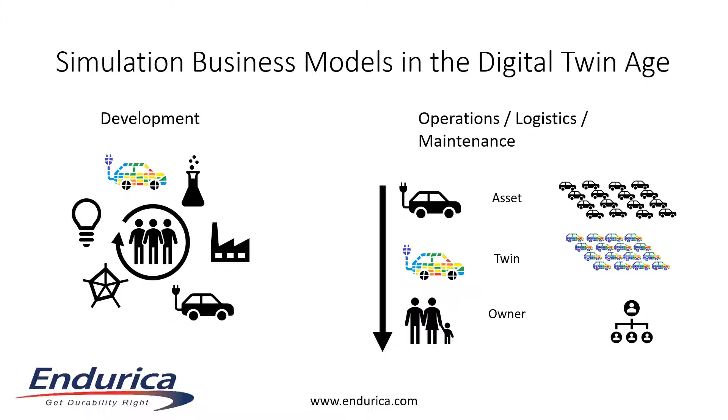So how close to this vision do you think we are? Let's assume that we can get displacements or loads off of the car frame. There's existing sensor technology for that, right? Assuming we can do that, what barriers remain? Well, first of all, we're going to need to be able to take those displacements or loads and convert those into strain history, stresses and strains on the part. Now, traditionally, finite elements can do that very well, although that's traditionally been a very slow process.

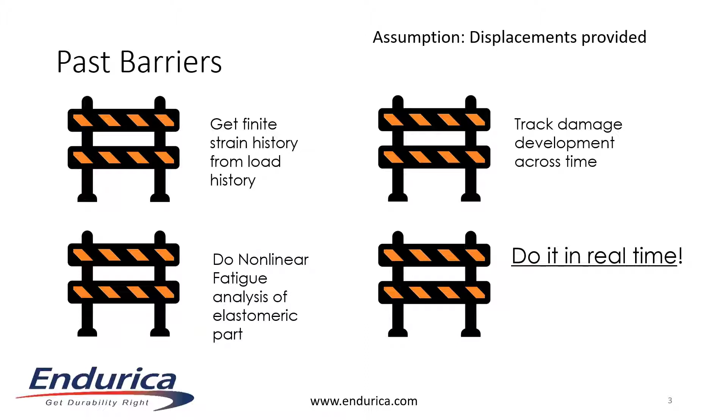So that's one barrier. Another is that we're going to need to be able to do a fatigue analysis, and of course, rubber fatigue has to involve certain nonlinearities, certain special effects. We have some fatigue solvers that can do that. We're going to need to be able to iteratively update the damage state every time we get a new sample of the latest displacement or load history. So that's another barrier that we're going to need to get past. And then finally, all of these things, we're going to need to be able to do them in real time.

Okay, so let's dive right in. In order to get a twin up and running, there's two phases that we're going to need to go through. In the first phase, we're going to implement and initialize the twin, right? Get everything set up so we can run it. And then the second phase is actually running the twin. Now, in the implementation and initialization phase, there's really two big tasks that we have to do.

The first one is to address this barrier with the finite element, right? When we're running the twin, the finite element analysis is not going to run fast enough to operate in real time. So we need something faster that lets us convert from loads and displacements into stresses and strains on the whole part. And we're going to use a tool called Endurica EIE. It's what we call an interpolation engine. And the basic idea is that you use your finite element model to model a series of pre-computed finite element solutions.

We store those, and then that becomes a nonlinear map between displacements and strains, and we can evaluate that map very, very rapidly. We've done benchmarks, and we can hit speeds of about 10,000 times faster than a finite element job using EIE if we've pre-computed the solution. So that's one thing we're going to do to get set up.

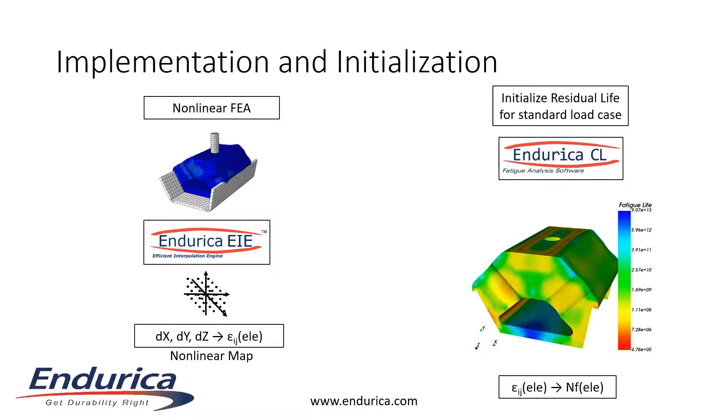The other thing we're going to do is we're going to initialize residual life by means of a standard load case. So we're going to have some standard load case that's sort of nominal operation of the part, and at time zero, before we've accrued any history, we're going to ask the question, how many repeats of that standard load case can the part endure? And then as the part accrues actual loads, we're going to use that standard load case as a measuring stick to quantify remaining life in the part.

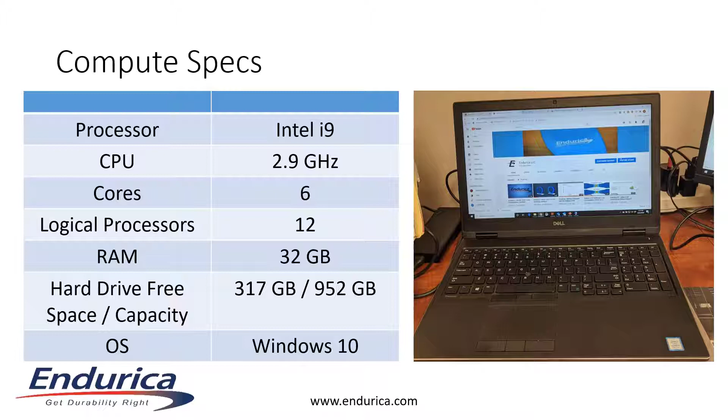So in the example I'm going to show you, I'm running all of these examples on my laptop. We're going to do this live for you. You can see it's a couple years old, but a good spec, but nothing crazy. 2.9 gigahertz, 6 cores, 32 gig of RAM, running Windows.

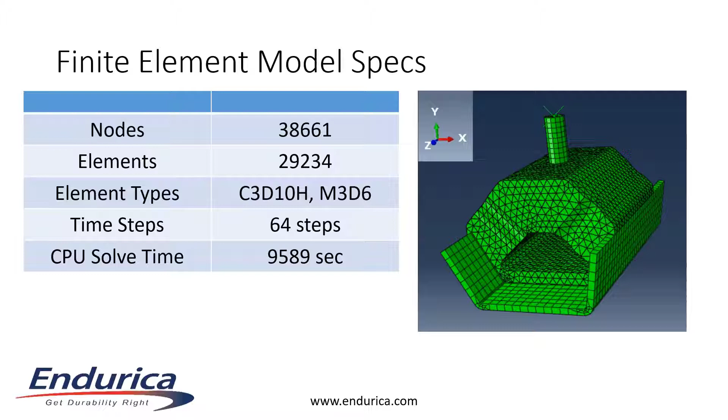So the finite element model that we ran to implement the nonlinear map is shown here. It's a model that has almost 30,000 finite elements. These are solid continuum hybrid elements, and we've also used membrane elements on the free surfaces to increase accuracy of the plane stress condition. Cracks in this part initiate on the free surface. In this model, there are 64 time steps, and we'll talk a little bit more about that in the coming slides. The total solve time on this is not quite 3 hours.

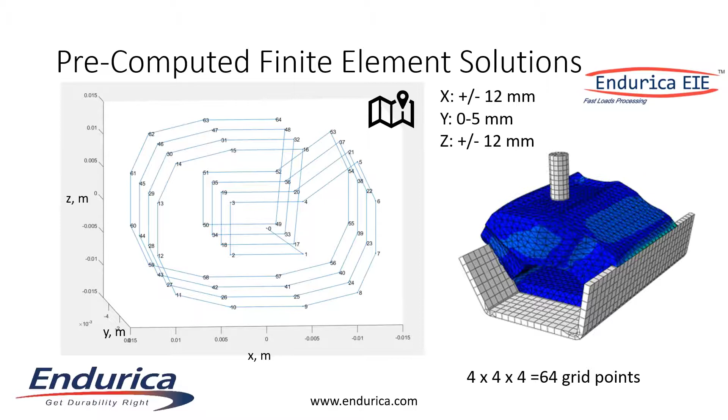After we build the map for interpolation, then we need to initialize residual life on the part. We use Endurica CL to do critical plane analysis of the standard load case. In this case, the standard load case is a single compression: no X load, no Z load, just a single compression to 3.75 millimeters of displacement. Endurica CL uses a technology called critical plane analysis. For our critical plane analysis, we've done the calculation on 17 planes for each element.

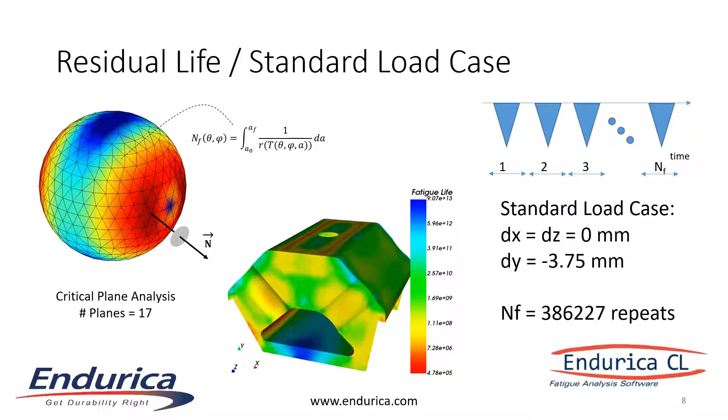Basically we're assuming that a crack could take any orientation, and we're looking for the crack that gives the shortest life. When you do this analysis for this mount under the standard load case, before accruing any damage, this part has a residual life of 386,227 repeats. So now we have our interpolation map set up. We have our digital twin initial residual lives initialized. So we're ready to start operating the twin. I'm going to show you an example here in just a sec.

When we send the data acquisition information, the first step is to send it to our nonlinear map. EIE is going to use the map to interpolate the loads and produce strain history for every finite element in the model. Once we have the strain history, we're going to pass that to our Endurica DT fatigue solver. We're actually going to run two jobs. The first DT job is going to accrue the damage in each element that occurs because of those strain histories.

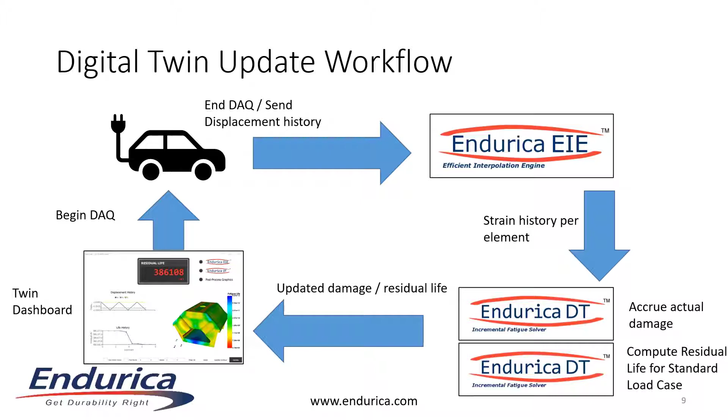Now that's kind of a hypothetical because it assumes a certain kind of load history going forward, but that's what we're going to use as the measuring stick of residual life. We'll also be able to look at crack length as a function of accumulated increments. And then we can pass out the residual life and the crack length for each element in the model. We can display those on a dashboard, and we're ready to start the whole process. So let's go do it.

All right, let's do this. First thing I'm going to do is kick off the digital twin interface. This reading here is the number of repeats of the downward standard load case, 3.75 millimeters down. Also going to launch the Windows Task Manager so we can watch the CPU. There's 6 cores, so when it's pegged, that means you're running on all 6 cores.

So for the first load step, before we bring in real data, let's do a few verification cases. The first thing I want to do is just load up the standard load case. So we're going to do a 3.75 millimeters downwards displacement and just a single cycle. What we want to see is that we produce a decrement of 1 repeat in the residual life, and that's exactly what happens. So I do 3.75 millimeters down, I get a decrement of 1 on the cycle.

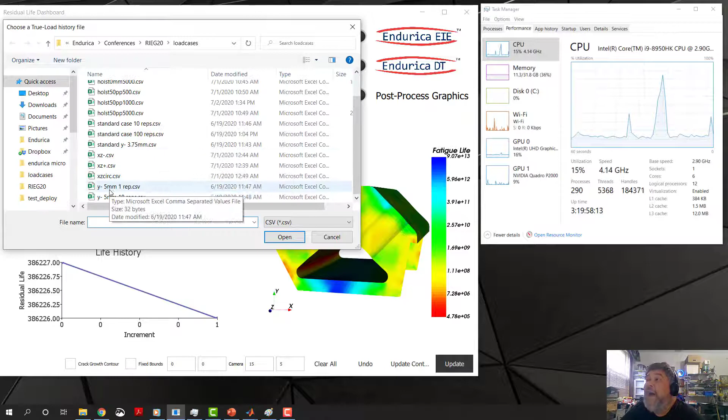So we could also say, well, what if I do a heavier load? Instead of 3.75 millimeters, what if I do, say, 5 millimeters? Well, so here we go. I've just hit the update button, loaded up the data. Here's a single cycle, 5 millimeters down. And what this is telling us is that the 5 millimeter down load case has decremented the residual life by 3 repeats of the standard load case, which, if you remember, was 3.75 millimeters.

You can see this is the plot of residual life versus the data file that we've uploaded. In the first one, it went down by 1 cycle, and now we've gone down by another 3 cycles. So this is the displacement history. This is the residual life history. The contour colors that you're looking at are showing the residual life at each element in the model. You can see that the deepest red is occurring on the inside crease here. So as we load in compression, we're seeing cracks on this inside radius.

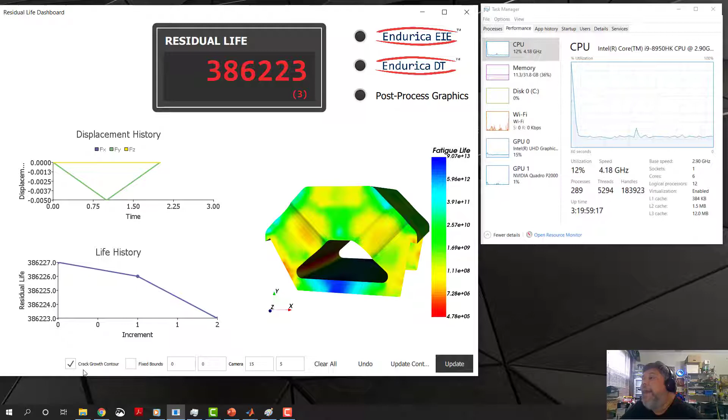In addition to looking at residual life, we also could look at change in crack length. I like that view. Let me update it here. I like that view because it better highlights where the most recent damage is occurring. And so you can see, again, it's on that inside crease. We're seeing a crack growth of something like 8 times 10 to the minus 7 millimeters.

As we're going through this, also notice these lights. These are showing you run time: how much time is spent in EIE, how much is spent in DT, and how much is spent developing these graphics.

Also before we go on, I'm going to put on a little bit of background music for your listening enjoyment. Thought I would play Mars, the Bringer of War. How's that for a background? So let's play that.

Okay, so we validated that it works for a bigger load. What if we do multiple repeats? Instead of doing one repeat of the standard load, what if we do 10 repeats of the standard load? Well, I hope it would decrement by 10 cycles. So here's 10 cycles, and here's a decrement by 10 standard repeats of the load. And you can see the count has gone down. You can see we haven't really changed the failure mode because we're just pushing harder in the same direction.

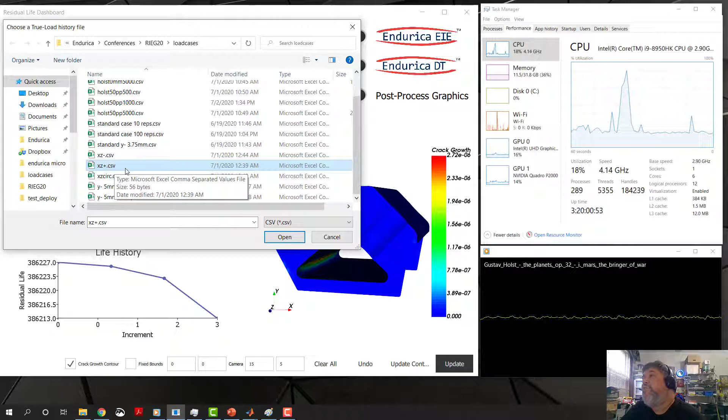Fine. What if we do something a little bit different now? What if we push in the plus X plus Z direction? I've got a data file here where we've set that case up. We're going to push 12 millimeters in the plus X direction simultaneously with a push 12 millimeters in the Z direction. So let's go ahead and run that. 0 to 12, a single cycle.

Now this has a little bit of compression on it. It's got the standard 3.75 millimeter compression. That's the green line. And in this case, these lateral loads that we've just imposed don't really decrement the residual life counter, which maybe doesn't surprise, because the damage that's going to happen isn't necessarily the same as what we were seeing before.

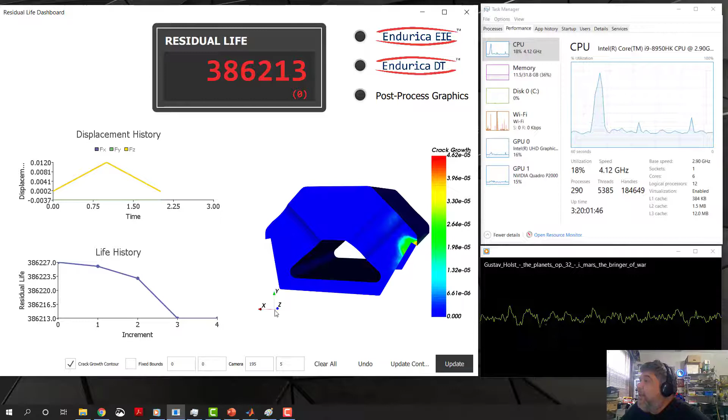Now we don't see any damage on this back face, but before we move on, let's check the front face of the mount. So I'm just going to rotate the view by here, and what you can see is that we've done some damage on this corner of the mount, right? So if we're pushing in the plus X direction and in the plus Z direction, that means these three corners are in compression, right? They go more into compression, but this corner goes into tension because of the lateral load that we've applied. And so that's the corner that gets the most damage. That makes sense.

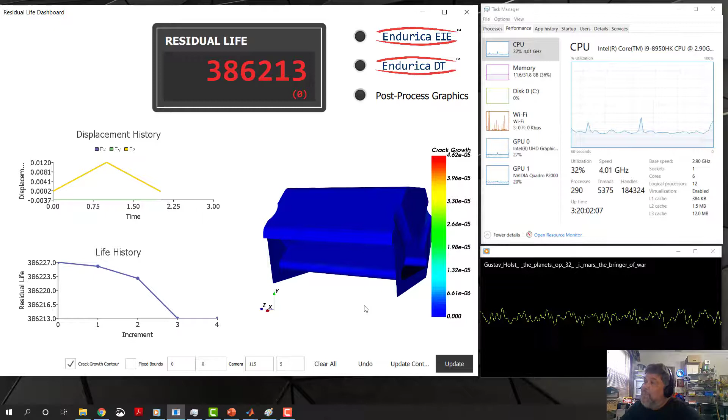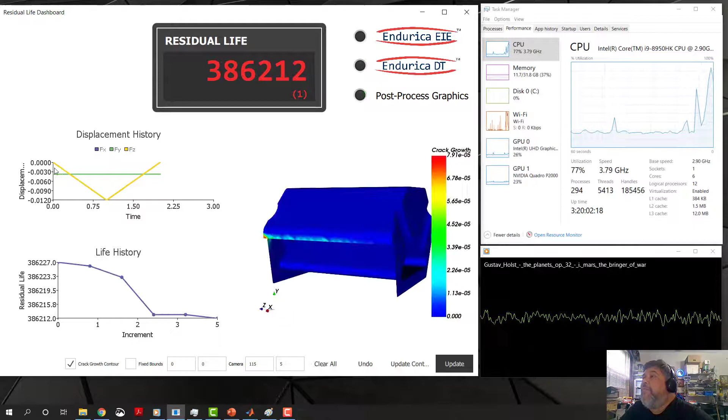Let's set the view back to the front face. And now we pushed in the plus X plus Z. Let's push in the minus X minus Z and see what happens. What do you think will happen? Well, so here's our load downward in the minus 12 directions for X and Z. Here's our Y direction load static at our 3.75 millimeter displacement.

And you can see that by pushing back in the other direction that, let's see, I want to make this 15 degrees. Now on the front face, after we've done this in the other direction, now we're seeing the opposite corner also getting some damage. So I've got tension damage that happened on this corner and on this corner, right, on opposite corners, because I did plus on the diagonal and minus on the diagonal. These two other corners really have very little damage on them at this point.

Let's, as a next step in the demo, do a circular motion in the XZ plane. And so I'm going to go ahead and load that load case. You can see it's just two sine waves, one shifted by 90 degrees, right? The Z channel shifted from the X channel by 90 degrees, again with a static displacement of 3.75 millimeters. And you can see now we're developing damage on all four corners of the mount, as you would expect. This circular motion does induce some damage. We've done 5 repeats of the standard load case worth of damage by this measure.

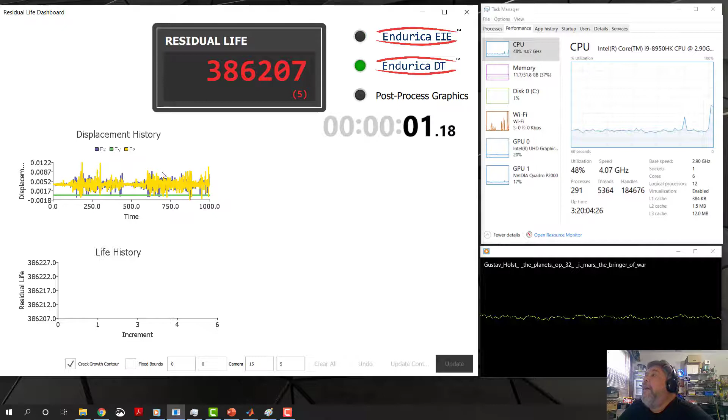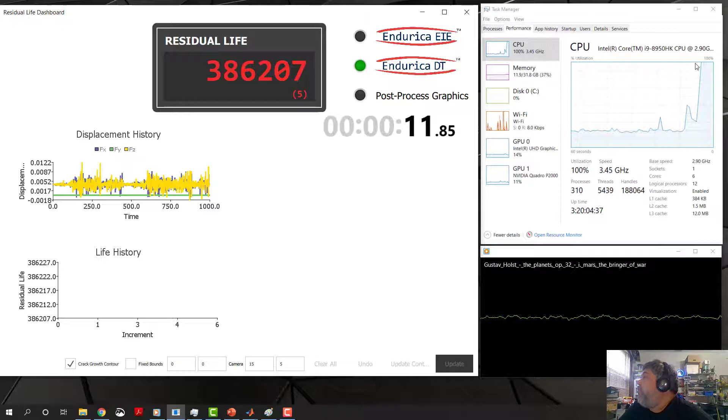And so you can watch the timer. I'm going to put a little timer here. You can watch the timer for 1,000 samples of the song, and you're going to see a decrement here once this finishes computing. You can see we're pegging. Now we're really making the computer work hard. Still solves in a very reasonable amount of time, couple of seconds. And you can see that the equivalent damage that we've done is about 3 cycles. Three standard repeats of damage is what the Holst song does to the mount.

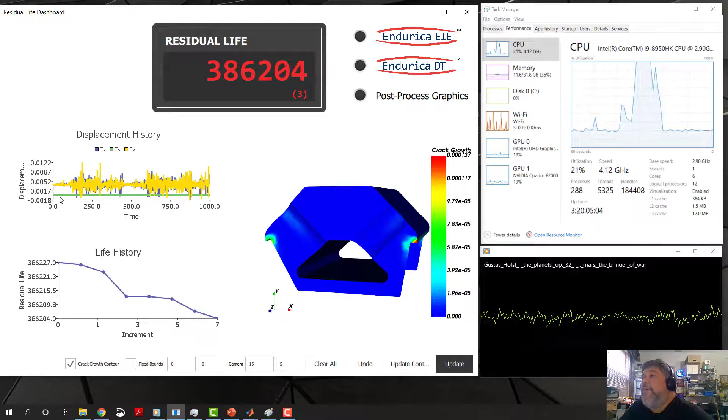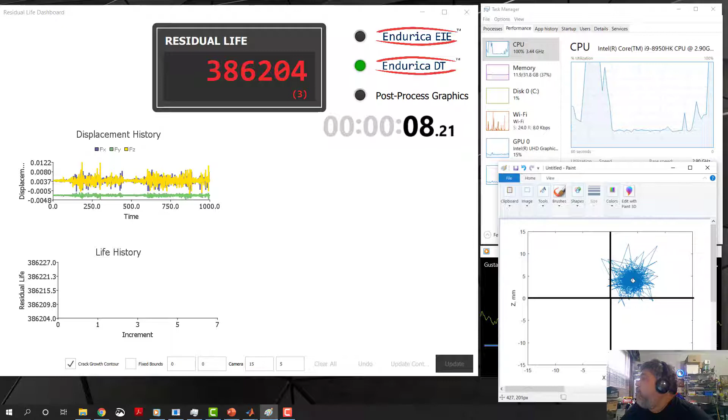Now this was with 0, right? The green line is at 0 millimeters. What happens if we put a little bit of compression and play the Holst song into the mount? Let's do that again, and that's this one right here. So let's go ahead and play that. Here's, by the way, a picture of the Holst signal in the XZ plane. You can see it has a little bit of an offset towards the plus X, plus Z direction. So it's going to be a little bit more damaging on the first corner.

Well, I guess it would be the corner that we have to turn around to see the worst corner. So I'll do that right now. Right. So here's the corner that's kind of getting the worst of the Holst signal, and you can see the damage that has developed. So that's been a quick primer in the digital twin prototype that we've developed. Thank you.

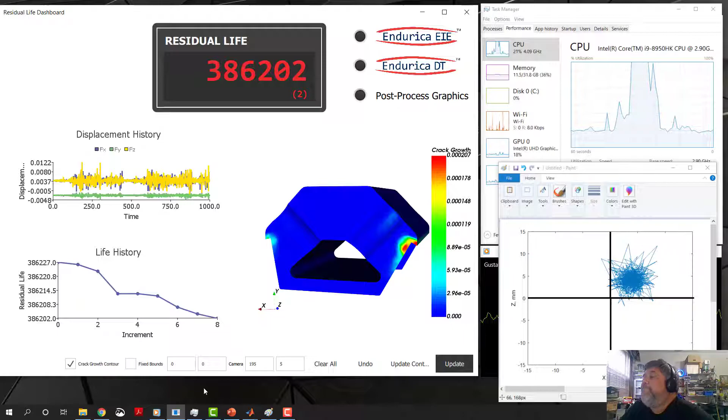So my message for you here today is that digital twin is here now. We built this prototype twin using commercial off-the-shelf tools. The only custom thing is the dashboard, and that's built out of very lightweight, well-understood pieces. We talked about the implementation and the operation side of doing this. We talked about the compute speed, and right now, just in our prototype phase, we're already up to a speed of better than 0.03 of a second per data point.

In the last 2 years, we've achieved a 10 times speed up in our code, and we have some new things coming in the pipeline, and we fully expect to get more than a factor of 10 speed up again over the next 2 years.